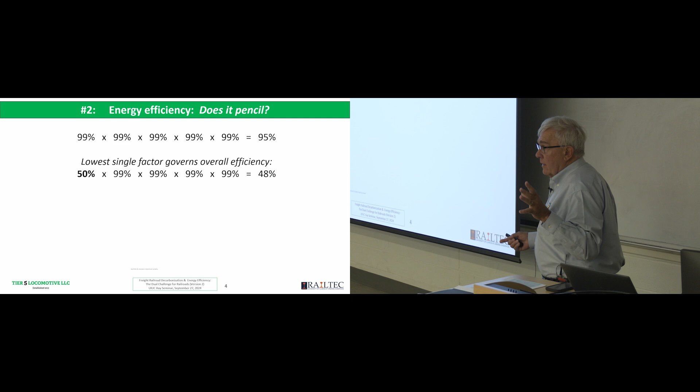So I have an example here of 5 energy conversions, each one 99% efficient, and we end up with 95% efficiency at the end. If I drop one of those factors down to 50%, my overall efficiency goes down to 48%. Basically, the rule here is the lowest single factor governs your overall efficiency.

If we go back in the history of the railroad industry, with steam locomotives, the best steam locomotives in the late 1940s, early 1950s were basically 8 to 9% efficient. The boilers, the latest boilers, were 75 to 80% efficient. The lowest efficiency came from the reciprocating cylinder, followed by the rod mechanism on the driving wheels. But again, overall they were 8 to 9% efficient.

General Motors came out with the first commercially successful diesel locomotive, which was 23% efficient, looking at the diesel engine, the alternator or generator, traction motors, etc. The diesel locomotives were more expensive than steam locomotives, but the overall economic efficiencies were such that railroads in the US basically scrapped half of their fleet. Half the fleet was worn out by the Depression and World War II, and the other half was relatively new, less than 10 years old. The Class I railroads basically scrapped that technology, got rid of the intense shops and staffs required to maintain steam locomotives, and transitioned over to a more expensive liquid fuel. But overall, there were great efficiencies to be gained.

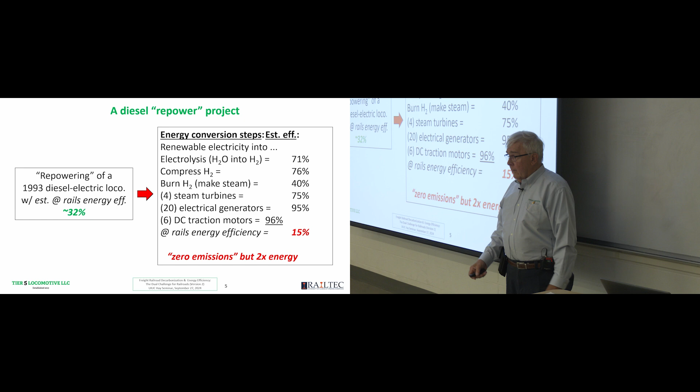Measuring energy efficiency - I want to make a comment here about the two primary forms of ground transportation: heavy-duty trucks and rails. Trucks historically have measured their fuel efficiency and published it in terms of miles per gallon, which is a very crude measure. You don't know how many ton miles they're producing, et cetera.

The historical average for heavy-duty trucks up until 2015 was basically 5 miles per gallon, for a roughly maximum 80,000 pound truck - that's not bad. Since 2015, there have been 3 projects jointly funded by DOE, the truck and trailer manufacturers, and all the accessory manufacturers, including tire manufacturers and rear view mirror companies now going to digital cameras instead of a mirror sticking out being an air drag. The newest trucks are now double the fuel efficiency.

They've gone from 5 miles per gallon to 10 miles per gallon since 2015. Railroads have done pretty well also, freight railroads. Historically, we measure in terms of gallons per 1,000 gross ton miles, over 64 years, and I'll reference - I did an ASME paper back in

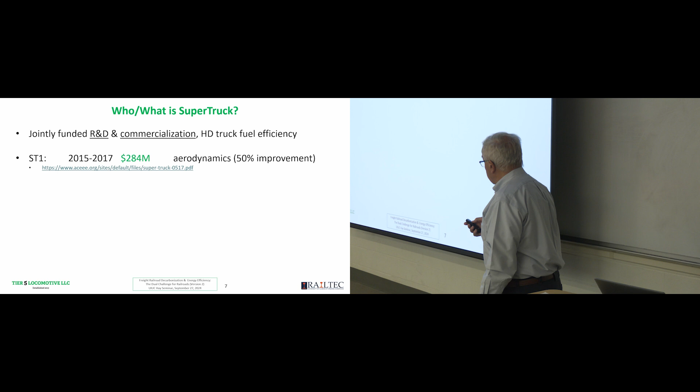SuperTruck 2 followed, and it was high-efficiency engines, taking diesel truck engines from 40+% all the way up to 55% efficiency, a high-efficiency transmission, and other improvements. That basically took the heavy-duty trucks, the new tractor trailers, from 5 miles per gallon to 10 miles per gallon.

And now DOE and most of the same suppliers are jointly funding SuperTruck 3. What's the goal of SuperTruck 3? It's to come up with an electric transmission for a Class 8 tractor, which will enable the truck to generate its onboard energy from either hydrogen fuel cell or batteries. When you add up the 3 SuperTruck programs, it's just short, by my math, of $700 million. This was, to me, a golden opportunity for the trucking industry.

Again, it's half federal dollars and half manufacturers. Most of the improvements have now been commercialized and are available for those who go out and buy Class 8 tractors and Class 8 semi-trailers.

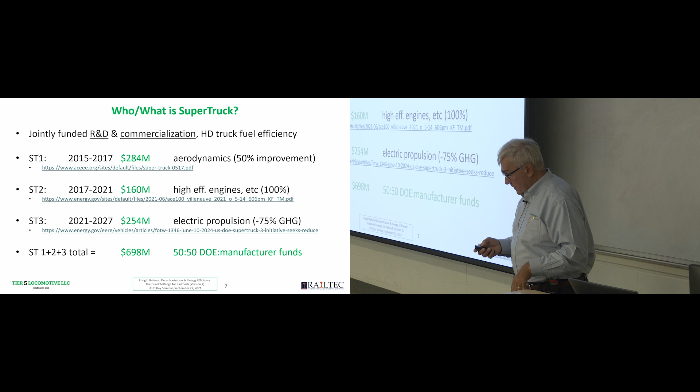I'm not a country western fan, I'll admit, but when I'm driving on the interstate coming down here, I have a certain tolerance for Willie's Roadhouse, Willie Nelson, and I like some of the country western.

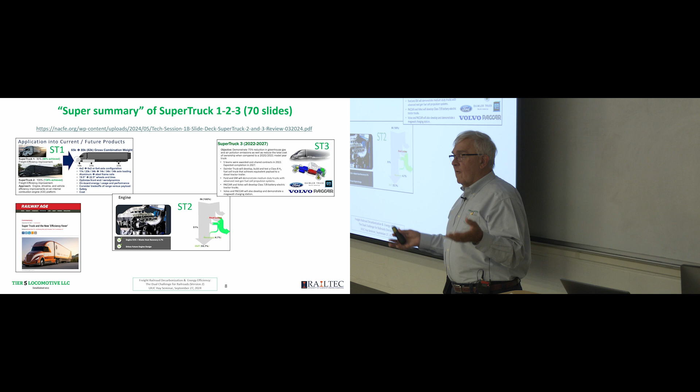I stumbled on an old country western song called Freightliner Fever, from I think 1965. He talks about blowing a freight train off the tracks coming out of LA with a Freightliner that obviously was cruising slightly above the speed limit. The thought occurred to me, this is a great segue to talk about SuperTruck versus the railroad. So you might want to look up that article and look up Freightliner Fever while you're at it. It's kind of a catchy tune.

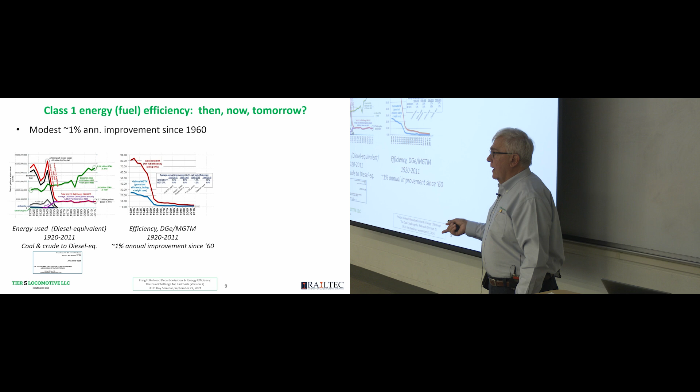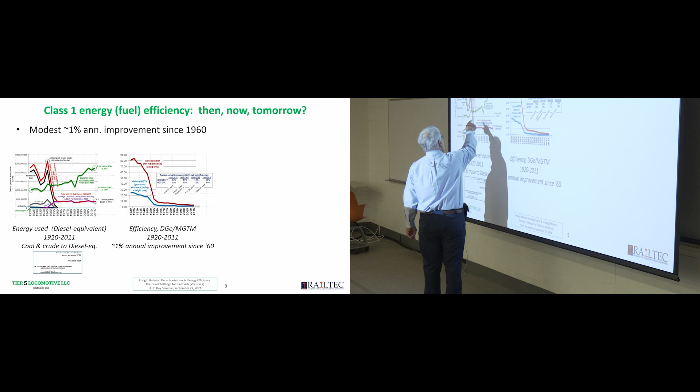This bold red line shows the peak for energy usage. In 1945, the freight railroads used the equivalent of 27 billion gallons of diesel fuel. Today we burn just over 3, so we used 8 times more energy than we do now. And we handled, in terms of gross ton miles, about 13 billion gross ton miles back then, and now we're about 3 times better in terms of the work we're doing. So we've made a tremendous improvement in fuel efficiency.

However, it averages out to a 1% improvement per year in gallons per 1,000 gross ton miles, and that would be my blue line here. The top line is revenue ton miles. Gross ton miles, I think, is more realistic because you have to move the freight car and the lading. That's why I favor gross ton miles.

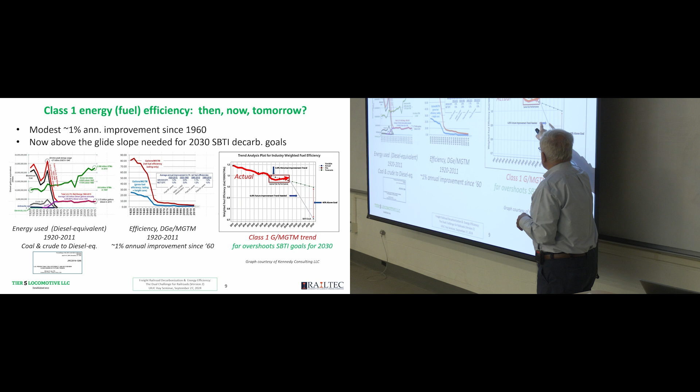It's gotten worse. What Wayne has done here is plot this line, which is the fuel efficiency improvement that would be needed to get to the published SBTI goals for decarbonization by 2030. The bottom line is that instead of a flat or 1% improvement right now, by Wayne Kennedy's math, the 6 Class 1s will have to kickstart and get a 6.8% improvement in order to get there, if you're depending solely on fuel efficiency improvement to meet your 2030 goals. So again, this is another example of how energy efficiency projections and decarbonization goals get tied together.

All right, next slide: alternative locomotive energy efficiencies. I call this the taste test. I love to go shopping in a store, I love going to a hardware store, I love to look at all the neat things and think, what could I do with this? I'm tempted to buy it sometimes, but I resist because it ends up on a shelf or in a drawer, and then the wife asks what I bought it for. But I was shopping one day and saw this display of a popular brand of soda pop, and I said, someday I'm going to use this photo, and here it is.

So we're going to take a bit of what I call a taste test. Has everybody heard about Sankey diagrams? Just to be clear, Matthew Sankey was an Irish engineer, and he produced what is recorded as the first true Sankey diagram, which shows energy in and work out of a system.

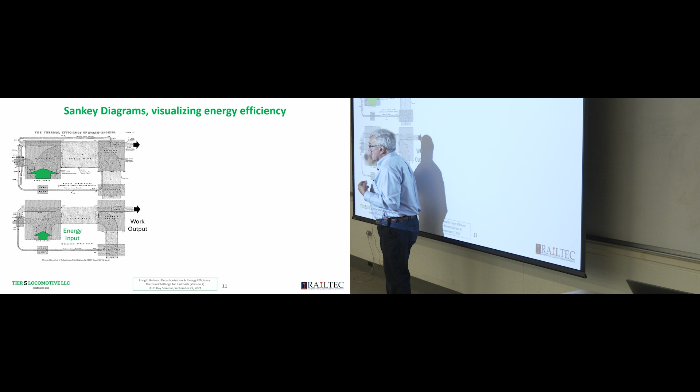The bottom diagram is a 1898 steam engine, assuming it was thermodynamically ideal, and on the top was a state-of-the-art 1898 steam engine. Again, you can see the comparison. The work out is the same, but the ideal engine has a much lower energy input than the actual engine. The difference is inefficiencies, friction, heat loss, et cetera, that makes the engine less efficient than the ideal engine.

In fact, it was Dr. Tyler Dick, who formerly got his PhD here and is now a professor at University of Texas, Austin, who turned me on to it. It's called Sankey-matic. It's a free package, and I'll show you some of the Sankey diagrams I put together.

If you divide energy services, which is useful energy, by the total of 100.3, you end up with roughly 33%. So 1/3 of all the energy we as a society use, from solar, wind, nuclear, hydro, coal, petroleum, etc., 67% of it goes away. It's not destroyed, it's lost as friction, heat, etc.

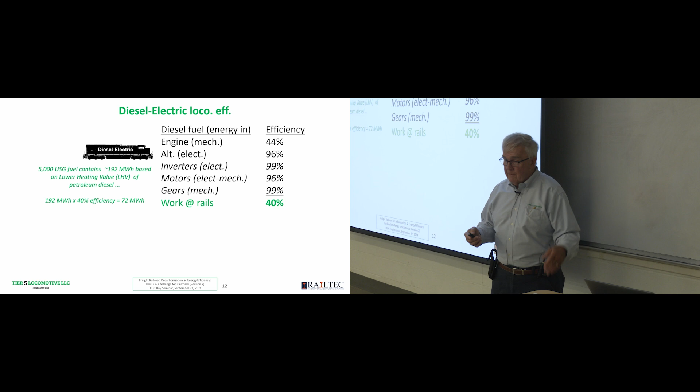If I convert that into a Sankey diagram, this is what it looks like. Again, for consistency, what I'm doing is showing 1 unit of work at the rails, and if you back up, you can see we have to start out, by my math, with 2.52 units of energy going in to get 1 unit of energy out at the rails as work. This is where, if you do a calculation using the lower heating value of 5,000 gallons of diesel fuel, by my estimate, it's the equivalent of 192 megawatt hours of energy.

The largest battery electric locomotive announced so far is 14 megawatt hours, for a mining company from a US company, for a mining railroad in Western Australia. It's 14.2 megawatt hours nameplate capacity, with actual usable between 85 and 90%. So you can see the utility of liquid fuel - we've got basically 192 megawatt hours of energy, and if you shake it down with the efficiency factor, you actually have 72 megawatt hours that are usable.

So that to me is a benchmark that I compare future locomotives, particularly battery electric, against in terms of: can I do the same work that I'm doing now? Now I want to branch off here and talk briefly about diesel engines, large bore diesel engines which are in locomotives, and proton exchange membrane or PEM fuel cells.

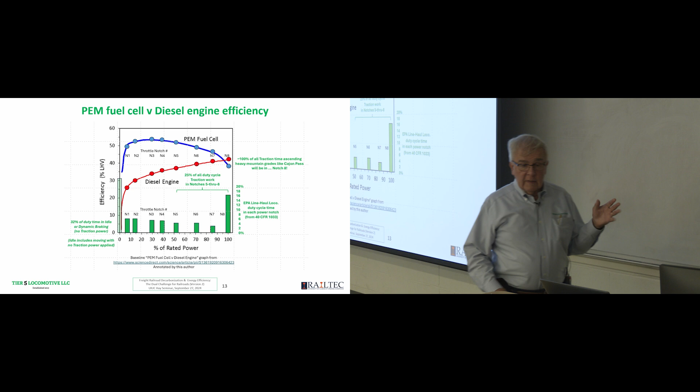So to me this is an issue that needs to be looked at more closely in discussions about potential fuel cell locomotives. Now I took a crack at a Sankey diagram for a fuel cell locomotive. Let's back up and look at the diesel electric: 2.5 units of energy going in, 1 unit of energy coming out.

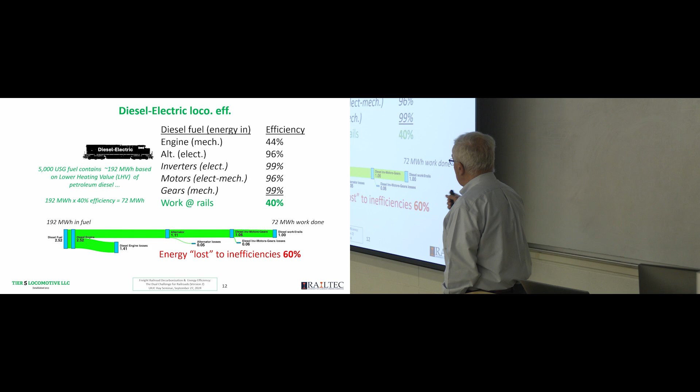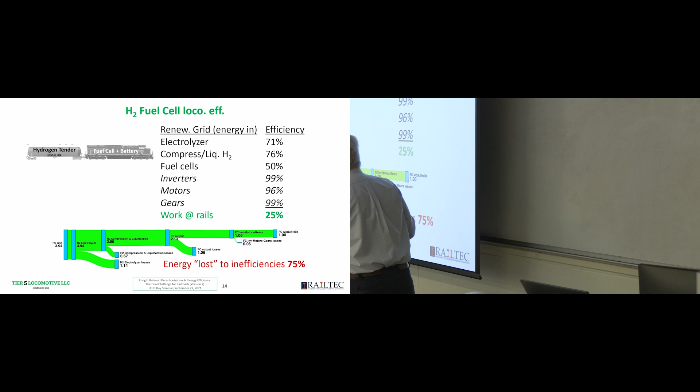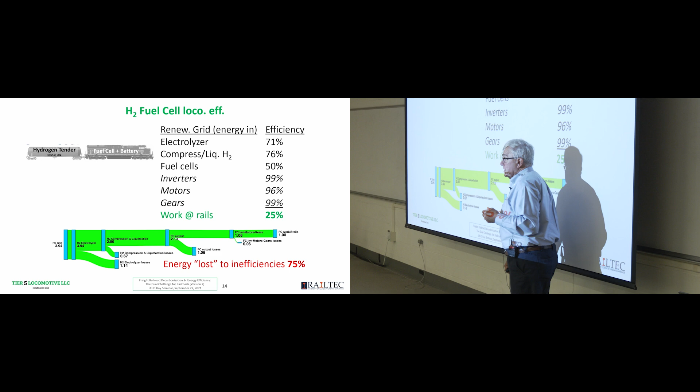When I look at the fuel cell locomotive, by my math, when I pencil it out, I start with just under 4 units of energy and get 1 unit of energy out. The biggest efficiency losses are - I start out with renewable electricity from a renewable grid, which we don't yet have. I lose 29% of the inbound energy to process inefficiencies in the electrolyzer, waste heat, etc. Then to compress it, I use another 24% of the energy - I get 76% efficiency to take the raw hydrogen gas and compress it.

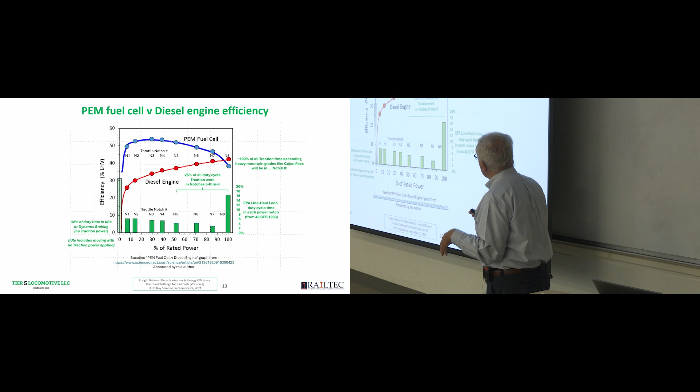If I want to liquefy it, my energy use is even greater than compressing it, so I'm just going to use 76% efficiency. The fuel cell itself, going back to what we showed, I'm assuming 50%, somewhere in the middle between 60 and 50%. And again, the same 3 final transmission items - inverters, motors, and gears. I end up with, by my math, 25% of the inbound energy at the rails as useful work. There's our Sankey diagram again. So by my math, I lose a total of 75% of the inbound renewable energy to inefficiencies.

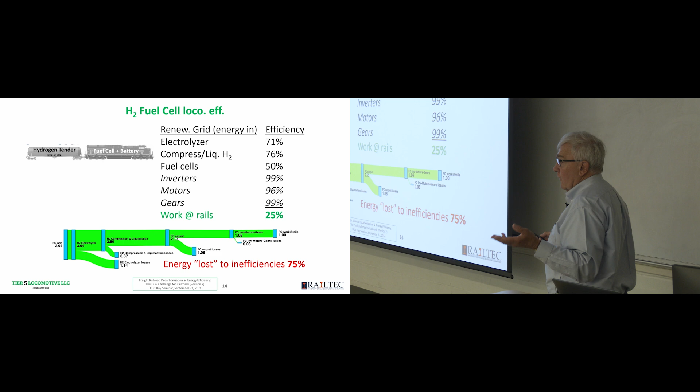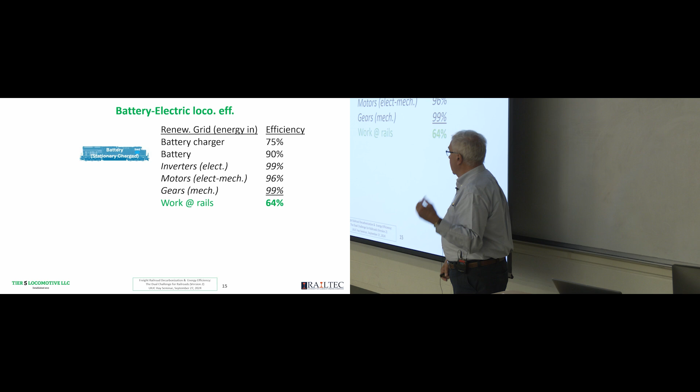If we do the same for a battery electric locomotive, again the final 3 transmission items are the same. The biggest loss is from the grid through the battery charger itself, and then a 10% round trip charging loss going in and discharge loss coming out of the battery. I end up with 36% loss, 64% efficiency.

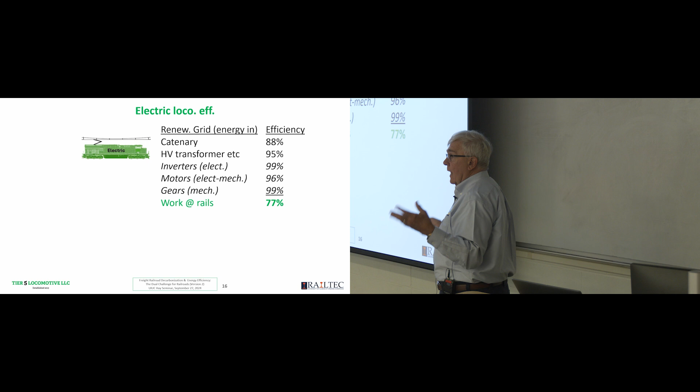And if I look at an electric locomotive, taking power directly from the grid into the catenary - about a 12% loss through the catenary system itself, then the onboard high voltage electrical devices, step-down transformer, line converter, etc., 5% loss, 95% efficiency. The same 3 transmission items, I end up with an efficiency at the rails of 77%, or a loss of 23%.

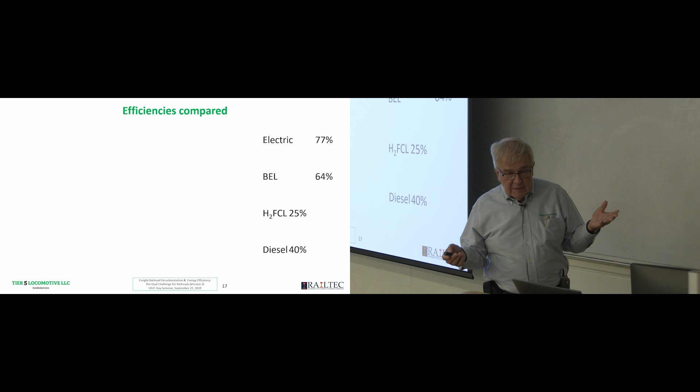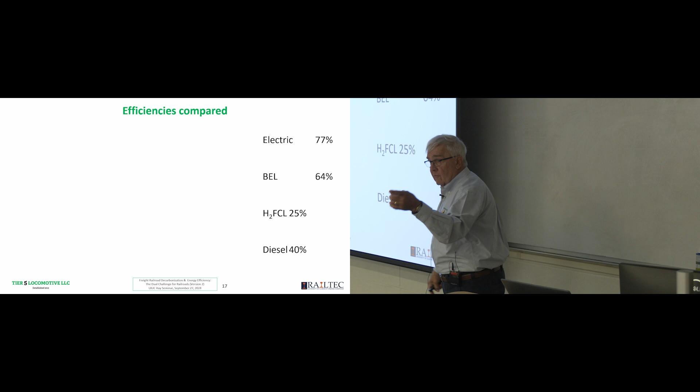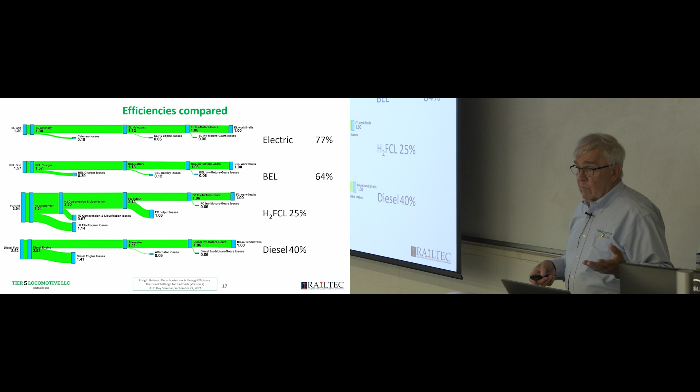Now let's - I've summarized the numbers here, and yeah, this 25 should be here and this 40 should be over here, so pardon that, I'll try to correct that for your file. But if we look at the 4 Sankey diagrams, that's how these things look. And I think this kind of analysis is something I'm finding sporadically.

Battery electric efficiency is much wider, 56 to 71%. The biggest issue is whether you're charging the battery electric locomotive stationary, or charging it in motion from the catenary, which tends to be more efficient but requires more equipment. You need a charging system on board the locomotive to take, for example, 25,000 volt AC and put it through a charging system to charge a battery that operates in DC volts.

And the hydrogen fuel cell range is amazingly pretty close, 17 to 25%. Diesel, I think most of the state-of-the-art Tier 2, Tier 3, Tier 4 are in the 35 to 40% range. But again, with the three electric modes we're looking at grid energy coming in, whereas with diesel we're starting out with liquid fuel in the tank.

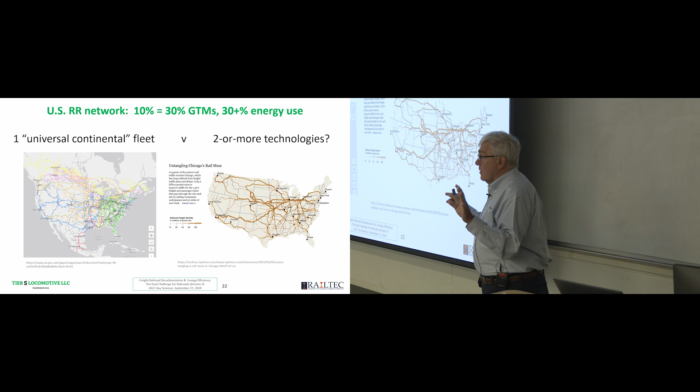So as we move forward, what's going to happen? Are we going to have the same fleet burning different fuels, or will we have to transition in part or in whole to some new technology? This is where I feel there needs to be a calm analysis of all the alternatives, including electrification, for the highest density main lines. That's all I'm going to say, but that's something that needs to be done.

Last week there was a Railway Age webinar, and I was fortunate enough to be invited. I presented some of the same slides about energy efficiency, and Jason Kuehn, vice president of Oliver Wyman Rail practice at Oliver Wyman Consulting, made a presentation, and I've copied one of his slides here.

I've actually copied two slides. He pointed out, as I've done in previous presentations, that heavy-duty trucks right now, the 8 largest fleet operators, J.B. Hunt, Swift, Schneider with the orange trucks from Green Bay, Werner from Werner Transportation from Omaha, the 8 or 9 largest fleet operators, they wholesale off their entire tractor fleet roughly every 2 years and buy a whole new fleet. They do that for 2 reasons: one, they avoid engine and transmission overhauls, and the trucks get cascaded down to the used market. It goes down to the large regional truckers, and then eventually, after about 7 years, it maybe goes down to the mom and pop fleets, the owner-operators, etc.

What he shows here graphically is that over a 30-year span, the trucking industry can have 10 to 15 turnovers of technology. If you replace your tractors every 2 years, in 30 years you will have been able to acquire 15 turnovers of technology. We, on the other hand, have essentially a 30-year locomotive, and we just replace the engine. So there's this difference between heavy-duty trucking and technological turnover and the railroad industry.

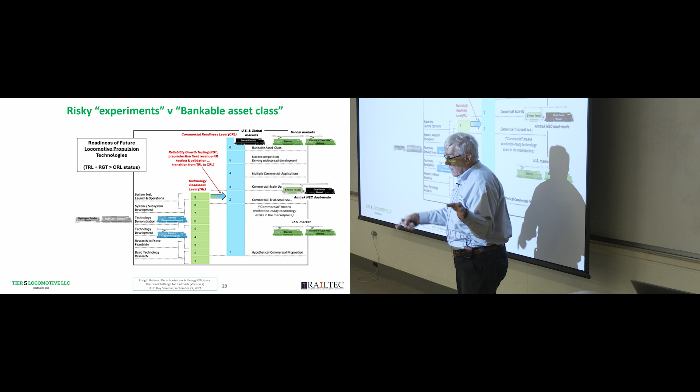There's a chart called TRL, Technology Readiness Level. It was produced by NASA, largely to sell the space shuttle to Congress. And the space shuttle was ranked at TRL 9, which means ready for launch. Unfortunately, there were five space shuttles built. There were 135 launches, 2 of them were catastrophic with loss of craft and loss of crew, the Challenger and the Columbia.

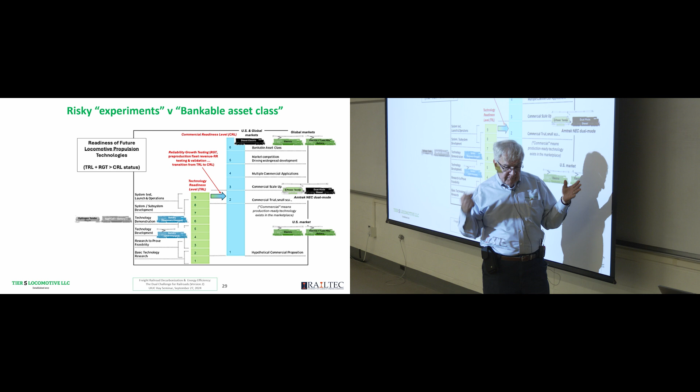And that's not real world for commercial aviation, obviously. So the TRL scale is good for experimentation. I've put on here, for example, where I think fuel cell locomotives are today, and battery locomotives with stationary charge. There's some work going on about battery locomotives with mobile charging. I've heard some rumors. But diesel electric locomotives are up here on this blue chart, which I found from Australia.

They call it the commercial readiness level. And at the very top, level 6, what do we see here? Bankable asset class. That means if I want to buy these, if it's at commercial readiness level 6, I should be able to go to an insurance company, a bank, whoever's got money, and get money to buy these and lease them and give them a good economic return, and not run the risk that these locomotives are going to get scrapped after about 7 years, which I did once with some 6,000 horsepower locomotives.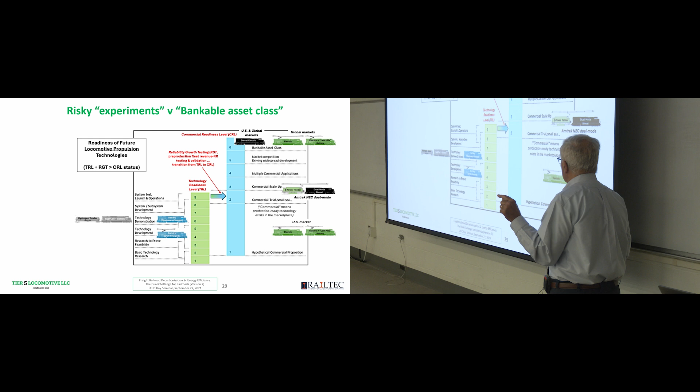So the key thing here, I have seen 2 generations of two brands of 6,000 horsepower: the Green Goat battery hybrid, diesel battery hybrids, and the genset locomotives. They were all basically rushed into operation and commercialization without going through adequate RGT.

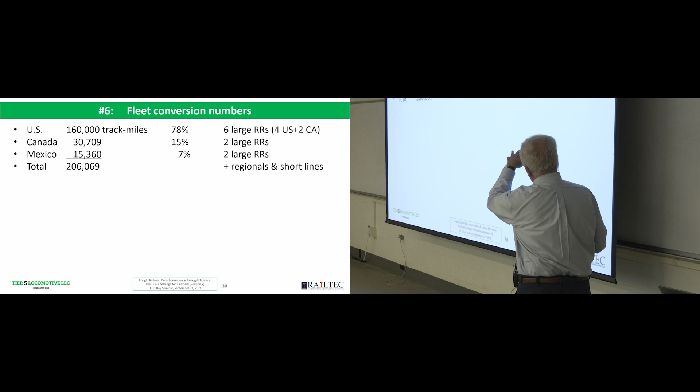Okay, fleet conversion numbers. Again, 160,000 track miles, 206,000 on the whole continent, 6 railroads in the US, 2 of which are in Canada, 2 of them also operate in Mexico, plus regionals and short lines.

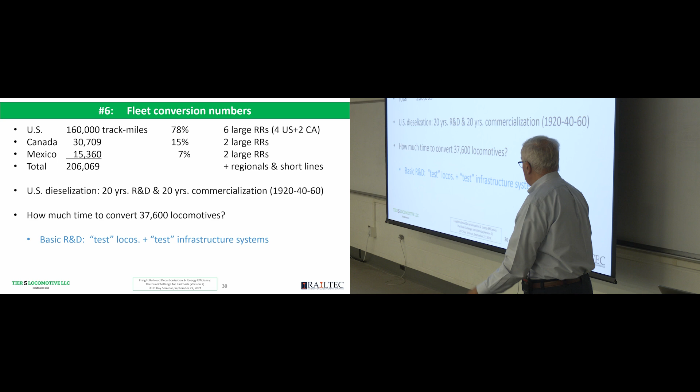And you can scale this down. I'm breaking it down into doing basic research and development, engineering, reliability testing of pre-production locomotives, and finally going into commercialization. And again, if you want to look at just the 23,600 locomotives on the Class 1 railroads in US, Canada, and Mexico, just the Class 1 or Class 1-like railroads, the big units, you can scale that down by 75% from 37,000.

Okay, I'm going to start with the year 2025. I want to end at 2050. If I assume that I can do 1 year of engineering combined with reliability growth testing, which is way too short, I'm going to have to modify over 25 years, 1,500 units per year. You can see as I spend more time doing engineering and testing, I have less time for production, so the conversion number goes up.

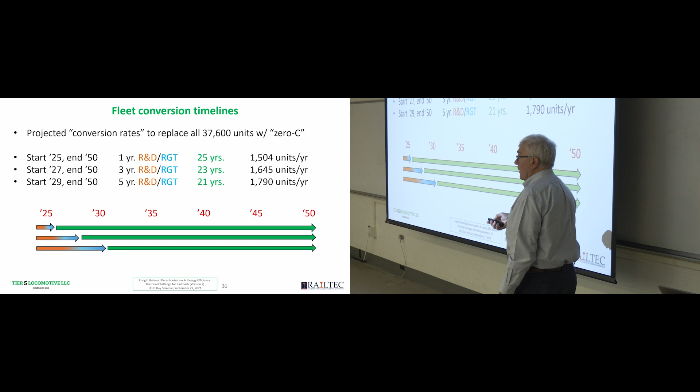Again, if I do 5 years of engineering, R&D, reliability testing, I end up with 21 years to do the conversion. If I spend 7 years, I've got to cram all my achievements into 19 years. And a point of reference here: the best year that the railroad industry in multiple decades was able to achieve was right around 1,550 new locomotives in a year, I think it was 1999 or 2000. So again, assuming we're going to modify or make new locomotives, these are the number of units you have to accomplish in the ever decreasing number of years you have to get to 2050.

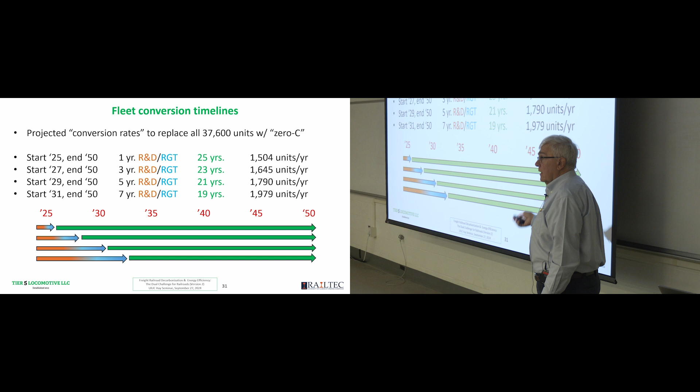Now, how quickly can green hydrogen replace diesel? This is where we talk about fuel cell locomotives.

Right now there's roughly 60 billion US gallons of diesel fuel used in the US. 40 billion goes to heavy-duty trucks. Ag and construction consumes 14 billion. Rail is about 3.9 when you add up freight, commuter, passenger, and Amtrak. Waterway is about 2.4 billion. I've rounded these up or down to 60 billion gallons.

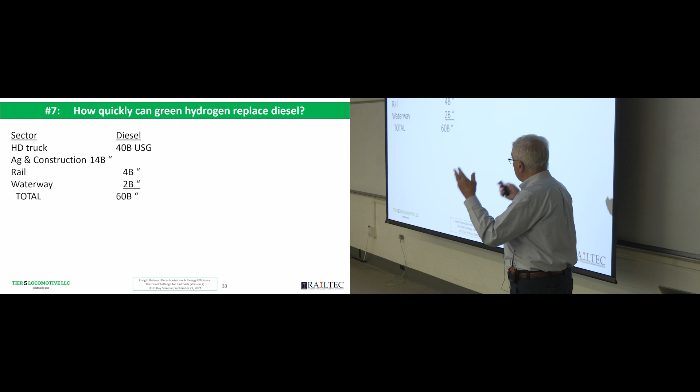Have you all heard about hydrogen hubs from Department of Energy? Anybody not heard? Okay, you can look it up.

The Department of Energy is making the final selection of 7 proposals around the country, obviously a political decision, where prototype hydrogen production plants will be built. DOE is contributing $7 billion, and the private partners are to contribute $40 billion, for a total of $47 billion on these 7 hydrogen hubs.

The goal is to produce just under 3 million metric tons per year by 2030. That's equivalent to just under 3 billion kilograms of hydrogen, and a kilogram of hydrogen is roughly the energy equivalent of a gallon of diesel.

Fortunately, an easy conversion. So in order to replace, rough order of magnitude, 60 billion gallons of diesel, you would need 20 times this project. 20 times 3 billion gives you 60 billion. 20 times $47 billion is $940 billion, just under $1 trillion.

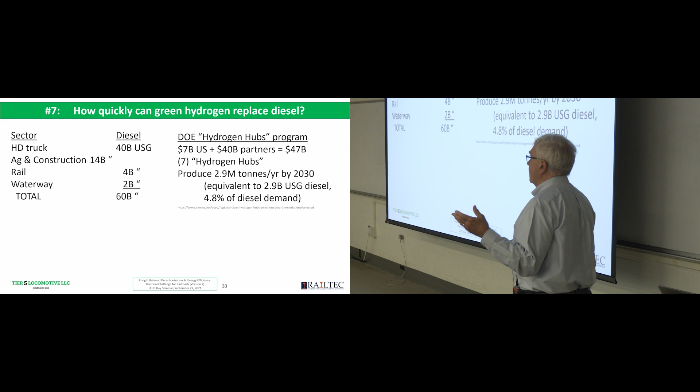So $1 trillion here and $1 trillion there. You better have an executive membership at Costco to get your, what is it, I think 5% back every year. Anyway, $1 trillion here, $1 trillion there, so I get half a trillion back, or I get a trillion back. No, I get $50 billion back, whatever. Big money.

So is there enough hydrogen by 2035 or 2040? I think we're not going to have sufficient zero carbon hydrogen quickly. It's going to take time. So this is another factor that's going to enter into any decision to use hydrogen fuel cell locomotives.

I did a calculation last year at the environmental conference, and you'll see this later, but the biggest plant in China right now is 30 million kilograms per year, 848 million US dollars. So pricing it up with labor and material costs, it's just over 1 billion.

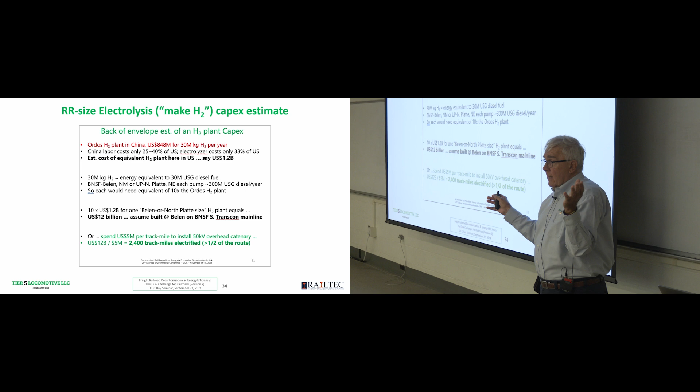The way I look at it, to put one of these plants at Belen, New Mexico on the BNSF Southern Transcon, by my math, you've got enough money to string catenary on 2,400 miles, one of the two tracks between Chicago and LA. But it's an order of magnitude calculation. I'm not trying to do battle with any entities here.

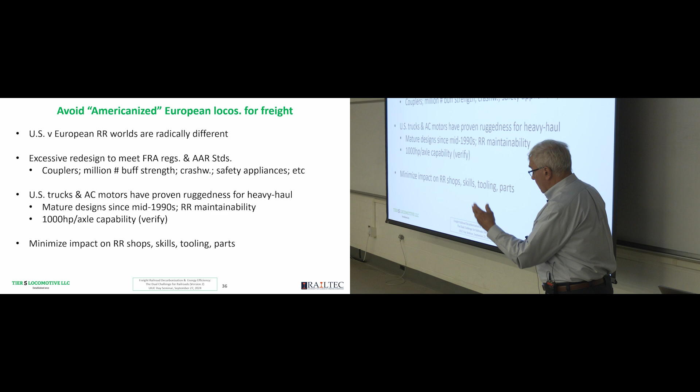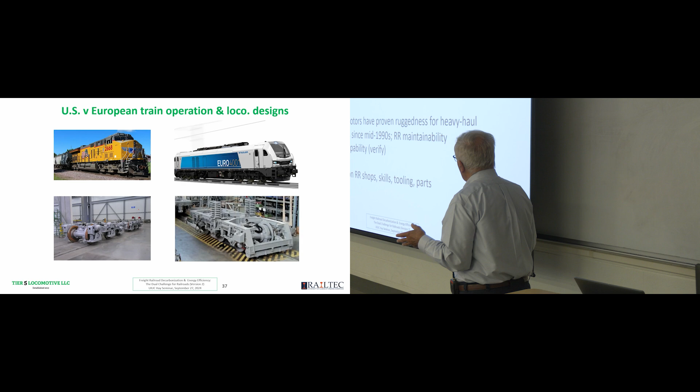Last thing, suggested path to future locomotives. In my opinion, people have said, well, there's these great electric locomotives in Europe, in Sweden, in Germany, and so on. I don't want to take European locomotives and Americanize them. They're not designed for operation in North America, and there are great differences in the trucks, the traction motors, the car body.

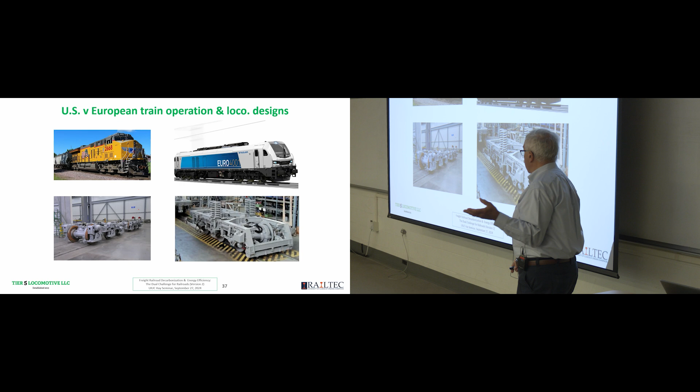You don't have switching steps. You don't have the million-pound underframe. There's a lot of work to make this locomotive, or others like it, pass the FRA and AAR regulatory and standard requirements. So what I'm saying is, forget about Americanization of foreign locomotives.

Fortunately, with the locomotives we have, I think one of the pathways is to take existing locomotives. You've basically got the engine, the alternator, the cooling system, etc. If you look at the battery electric made by Wabtec in Erie for Roy Hill, it's a 7 megawatt hour, essentially an Evo 4,400 horsepower Evolution AC locomotive that they basically started from scratch, but I think it's a highly modified diesel electric locomotive underframe, same trucks, same traction motors, etc.

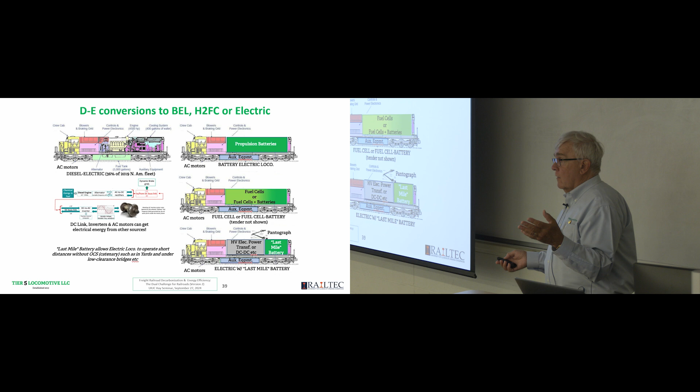What I feel is that we've already got a platform that, you know, you can have diesel electric locomotives, or you could make new similar battery electric, fuel cell electric, or even straight electric locomotives. So the talk about needing 7 to 9 years to engineer a new electric locomotive, I don't see that as realistic. I think that's excessive.

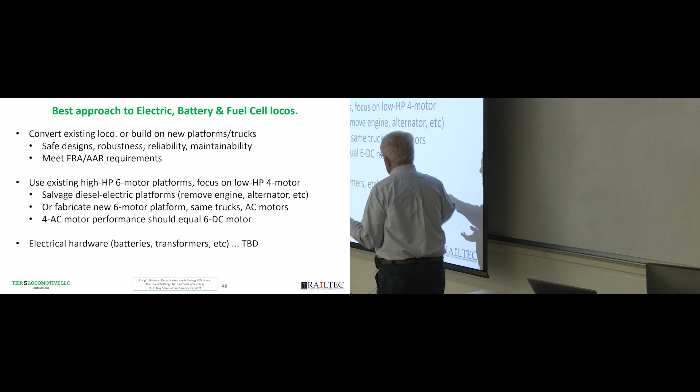Best approach, again, I feel is to convert existing locomotives. Another thought I have is if you put AC motors under, let's say, a modified GP38 4-motor locomotive, that AC traction motor locomotive should be able to pull as well at low speed as a DC locomotive with 6 motors. You can get more adhesion, more work down to the rail with AC motors.

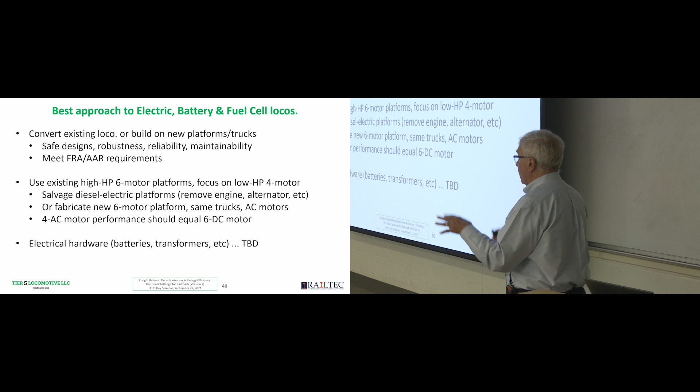So there's a couple of things that need to be thought about here if we're going to pursue this. From our history here, back in 1990 to 1992, the AAR had a working group. I think I'm the only person still in the industry who was a member. There were 26 railroads, including Amtrak and the former British Columbia Rail. The mission was to develop a specification for 26 test locomotives using AC traction that would be distributed to the member roads.

The railroads would pay for this through the AAR, and the AAR economics staff in Washington was also tasked with looking at the economics. On the first pass, they came back and said we can't afford these AC locomotives.

The premise was that AC traction motors would eliminate the extensive and expensive maintenance of DC traction motors, which have commutators, carbon brushes, etc. And the ROI analysis proved that was bad. You couldn't afford the locomotive.

There was one railroad that said, wait a minute, how much more tonnage can I haul with AC motors and the same horsepower? And when that calculation was run, it came out positive.

Unfortunately, or fortunately, the Burlington Northern and Electromotive Division of General Motors, in 1992, BN signed a contract for 400 SD70 Macs, and that launched AC traction.

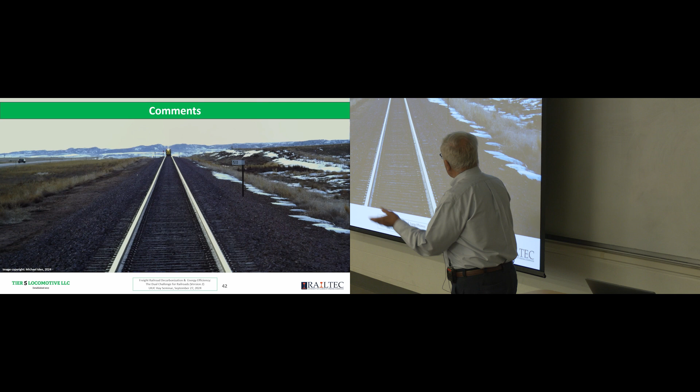But anyway, that brings me to the end here, and I hope this was informative. Again, I am not saying that electrification is the way to go. I'm not saying that hydrogen is not the way to go. There are a lot of details to examine and a lot of decisions to be made, but the key thing is time is passing.

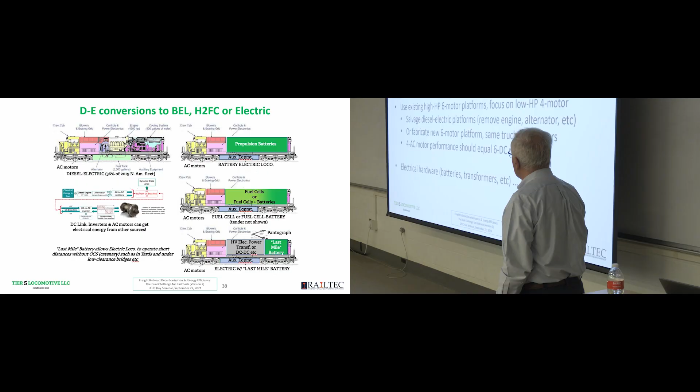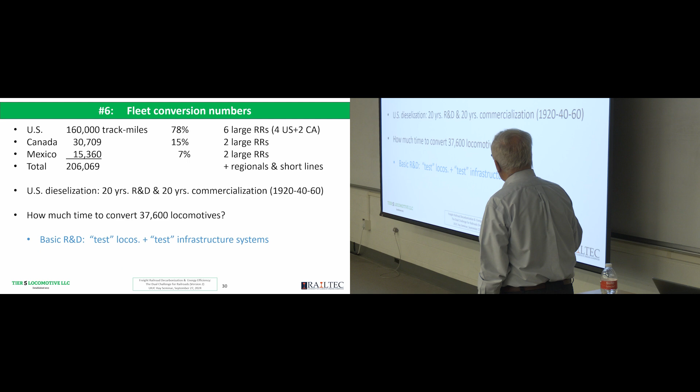Hello there. My question was on, you had that diagram of commercialization and readiness. You ranked, was it like European electric and electric with battery for last mile as very high compared to the American? I was just wondering, is that due to the lack of electrification of the rails in the United States, or is that due to differences in locomotives, essentially?

I think the real answer to your question, which is a very good question—and just forget the slide that I'm fumbling around trying to find the right slide, doesn't matter—the largest freight trains in Europe are roughly 1,700 tons and about a half mile long.

And it's because most of Europe uses the jack, screw, and hook couplings. They don't use the Janney type coupler that we use here, which is good for, on a good day, 375,000 pounds of pull. So to try to run a train like we run it here, often with head-end power, with the tonnages we haul, you would not be able to operate a train that big in Europe.

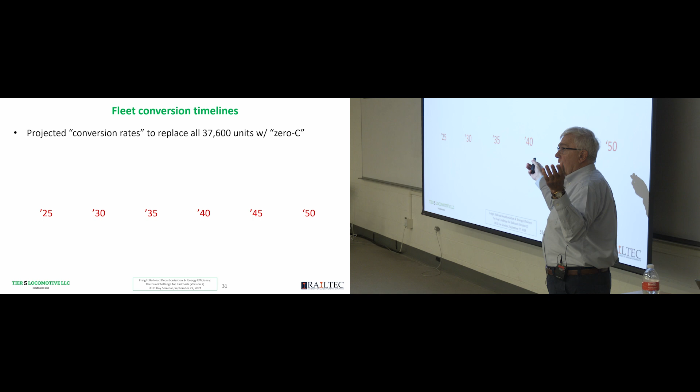In fact, a couple of years ago, there was a big to-do in Europe. They're now running a train that is twice as long as always, because they put 2 trains together and put 1 locomotive on the front and 1 at the rear, basically distributed power. Guess what? We've been doing that for 25 years.

So the biggest difference: freight trains in Europe, and I include the UK in this, are basically operated at a power level that keeps them out of the way of passenger trains. In fact, I was at a heavy haul conference in Dallas, I think in 2004, and there was a gentleman from DB, Deutsche Bahn, talking about the challenges of moving iron ore trains in the Ruhr Valley and keeping them out of the way of passenger trains.

As I recall, they were running 1,700 foot long iron ore trains, which is something we'd never make money on here. But they were operating these trains with sufficient power to get them up to 60 miles an hour. There's no way in our economy that you can run an iron ore train at 60 miles an hour and make a profit, but they were doing that to stay out of the way of passenger trains. So again, the emphasis in Europe is on speed and not on lugging capability.

Does that answer your question? Okay, any others? Yes.

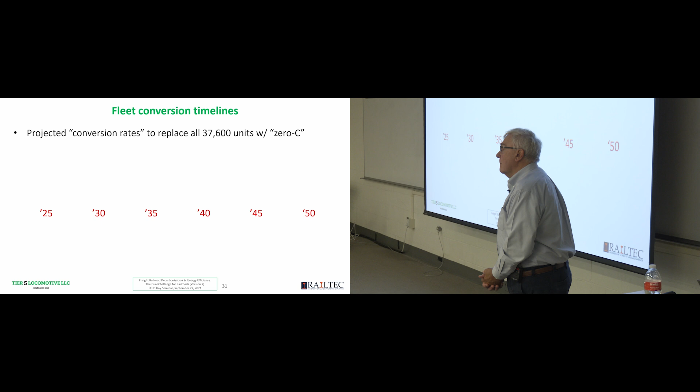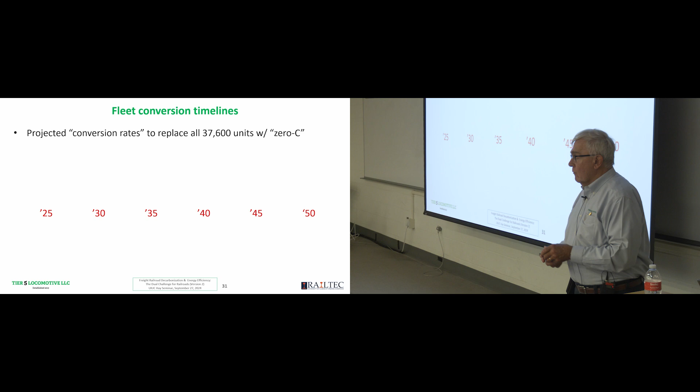So I guess this is more curiosity. When you mentioned the electrification and then the last mile battery, has there been any talk of doing the opposite, where the battery does most of it, kind of based off the moving charging battery concept to a larger extent? Has there ever been any talk of doing that for steep grades or parts where the diesel engine isn't as efficient?

Good question. In fact, the study we're wrapping up now for the FRA, the report won't be available for probably 6 months. It has to go through the FRA vetting before it's released, but I can say a little about it. One thing we looked at, in the limited time we had last week, part of the project was creating a spreadsheet financial model where you can put in different inputs and assumptions and calculate returns on investment.

One thing we looked at was what we call a taconite loop in the U.S., moving taconite ore trains to a dock. We looked at putting in overhead catenary and running electric locomotives, and the ROI was absolutely horrible. We also looked at battery locomotives with stationary charging, and battery locomotives with some intermittent catenary where you can recharge, and that positively changed the return on investment.

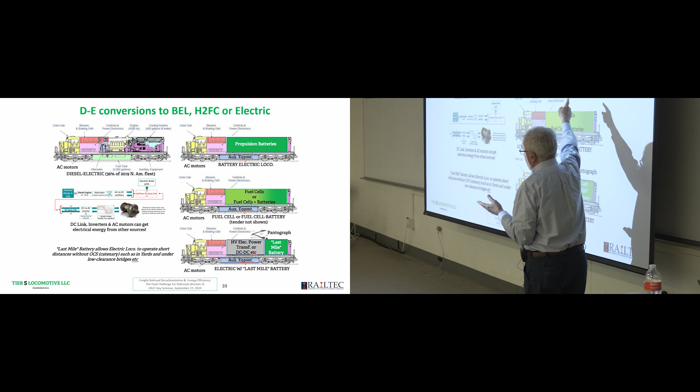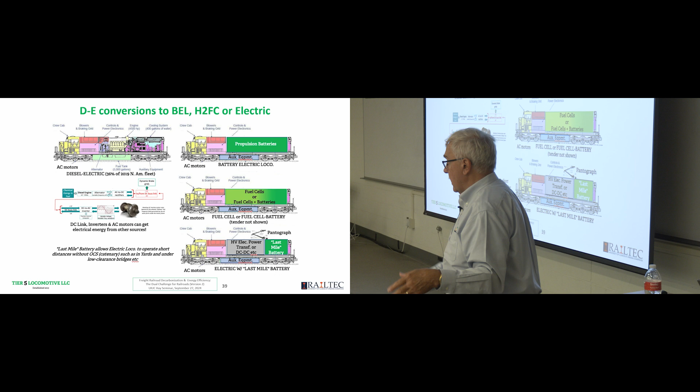So what happens is, when you have a battery locomotive and use discontinuous catenary, instead of having catenary from A all the way to Z, I have catenary from A to B, from E to G, from K to S, for example. I run on battery power in the gaps in between, and when I hit the catenary section, I raise the pantograph and charge the batteries. The alternative is to have a battery locomotive that can go the whole distance on battery charge without depleting all its charge.

And this is where you start to get economic trade-offs: how much catenary I'm putting in, what's the capex, what's the cost of maintaining it, versus can I make the battery locomotive smaller, put fewer batteries in, because batteries wear out and have to be replaced like a diesel engine. So you have these different cost curves. But that's one of the things with battery electric locomotives.

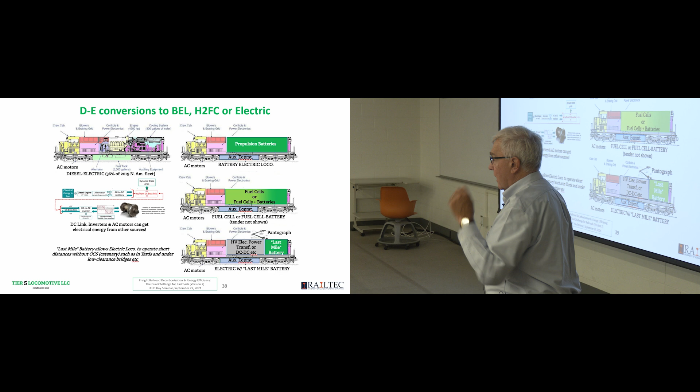The other thing I'll mention is the downside of a battery locomotive if you do just stationary charging. Let's assume it takes, just to throw a number out there, 10 megawatt hours of energy to move the train from here to there. With an electric locomotive, if it has the same power rating and tractive effort at the rails, I'll use the same 10 megawatt hours from the grid.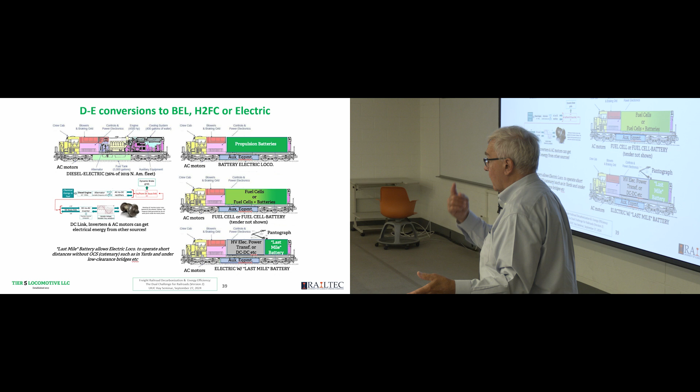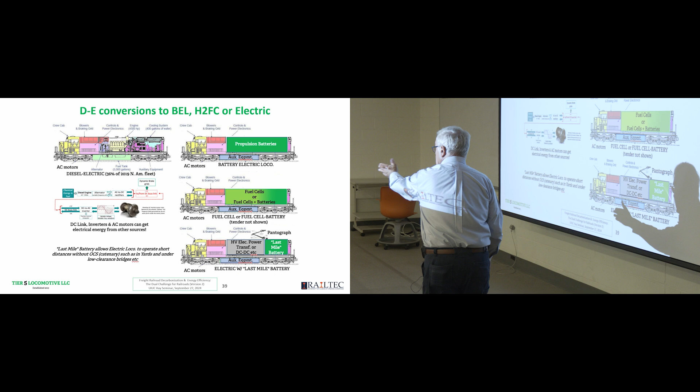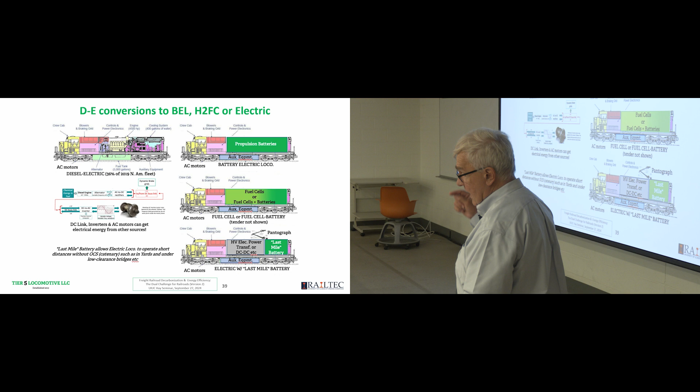But those 10 megawatt hours will be drawn down from the grid from this point all the way across, let's say over 10 distances, so 1 megawatt hour per unit time per unit distance. Whereas if I have a 10 megawatt hour battery locomotive, I want to slam all 10 megawatt hours into that battery as quickly as possible so I can get that locomotive back out to run productively. But now I'm ringing the doorbell of the utility and saying, I don't need 1 megawatt per hour for 10 hours, I need 10 megawatts and I need it now.

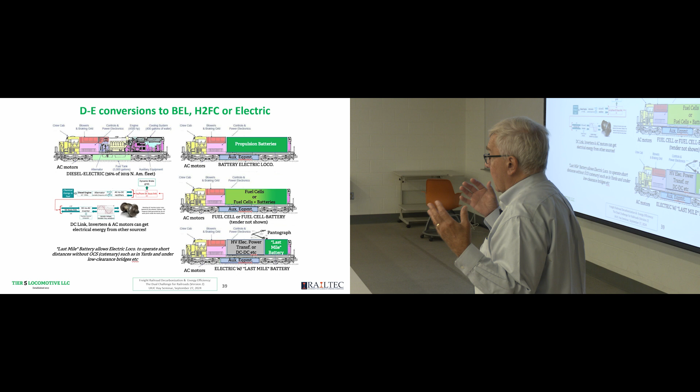And that's where you get into demand charges from the utility. It's like filling a bucket versus running with a long fire hose. You've got a bucket and you want to fill it with a fire hose and carry the bucket across as it leaks. That's the difference between electric and battery.

Has there been any look into swappable fuels? Like you slide out a tank and slide something else in, or you switch out a battery that's already full? Can you have a replaceable battery pack? Has there been any look into something swappable, like you take out a fuel tank or battery and slide a new one in that's full?

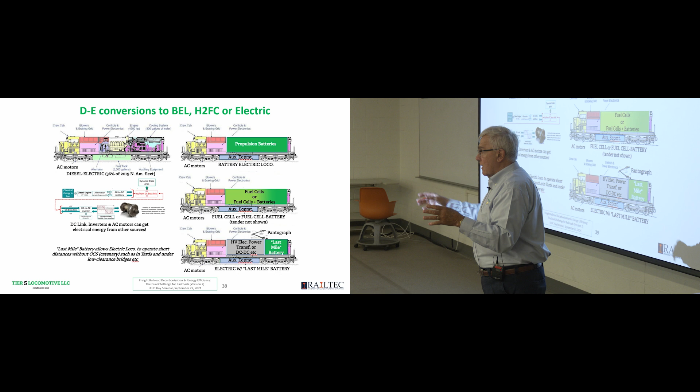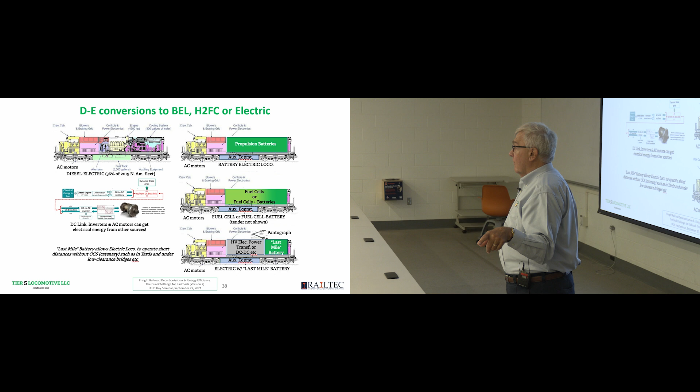There's a container terminal, I'm trying to think of what it is, Long Beach, LBCT, Long Beach Container Terminal in the Port of Long Beach, next to the Port of Los Angeles. LBCT is a highly automated container terminal. I think they have less than 30 people running the whole terminal. The shuttle trucks that take containers from the dock alongside a ship to the stacking racks, or back to the dock to be picked up and put on the ship, those shuttle wagons are battery powered, and they have a replaceable battery. When the battery gets down near minimum, the shuttle tells the computer that controls everything, 'my battery is about to die,' and it goes to an automated building where a robot picks up this 20-ton battery, puts it on a charger, puts a fresh battery on, and the automated shuttle wagon goes back out to work. So that has been done.

But when you start talking about the range of capacity, we're talking some pretty big batteries here. Now you're dealing with what kind of machinery you're going to have, and where you put it in the yard. If a train comes in, like here at Champaign, where do you put this machine to change batteries, knowing you may have locomotives on the front of the train and one or two in the middle or at the rear? Do you stop the train multiple times at one robot, or do you have them spaced out? It gets pretty complex. The answer is yes, but. Does that answer it for you?

Anything else? Yes, sir, right there. You have a radio announcer voice. Go ahead. Thank you. So what was my question?

I guess this is probably still being researched, but specifically for the large batteries, I was curious about fire safety and new technologies there, because electric car battery fires are bad, and this is so much larger. Is there a lot of research going into making that safer or trying to change that?

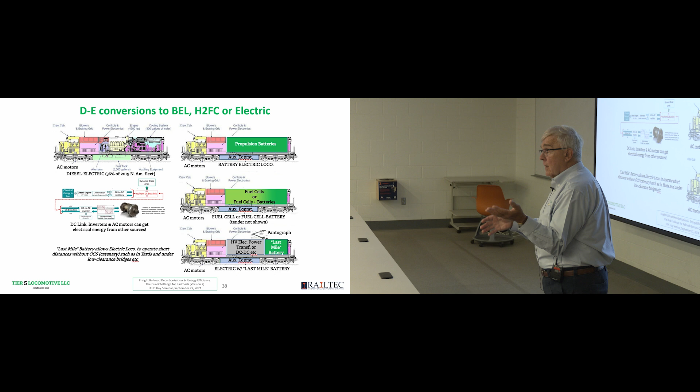I don't know what research has been done particularly on the locomotive size, but I know there's a lot of research going on regarding batteries in general. Back in August, there was a Tesla Class 8 semi-trailer, a Tesla battery tractor, on Donner Pass. The driver let the truck go off the road, it ran into a tree, he survived, and it took the local fire department and the forestry service, I read in the paper, 50,000 gallons of water on Donner Pass on I-80 to extinguish the fire, and they shut down I-80 for about 15 hours. That was just under 1 megawatt hour of battery capacity. So yeah, it's something, and then again, hydrogen has flammability issues as well. It's exceptionally flammable. And our trains never derail.

Well, that's why we count on you to come up with the statistics. Yes, sir. Oh, I'm sorry.

In your first two slides, you had an example where hydrogen was the combustion, but in the actual efficiency diagram, you had a solid state fuel cell. So in locomotives, which generally is more favored?

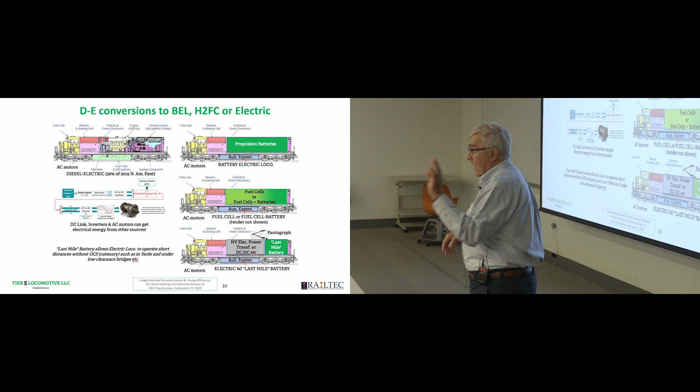Well, if you're going to use green hydrogen with a fuel cell, the hydrogen is technically not a fuel, it's an energy carrier. Because when you make hydrogen through electrolysis, you're creating hydrogen molecules, two hydrogen atoms combined. When you put it in the fuel cell, you're splitting the hydrogen molecule, and when you do that, you combine hydrogen and oxygen to make water, and you generate electricity. So in a fuel cell application, hydrogen is an energy carrier. You can also use hydrogen in gaseous form as a fuel by injecting it into a diesel engine. So that's the difference: in one application hydrogen is a fuel, because you're burning it, and in the other application you're actually carrying electrons into a fuel cell.

That makes sense, but my question was more, is one more favored over the other? Or is one more efficient?

Well, I think in general, people would like to use hydrogen in diesel engines because I can keep the diesel engine. So I've got an installed base of diesel engines, but the question is, can you modify all the diesel engines, or are we talking just about the latest generation, because there are different generations of diesel engines out there. So they're not necessarily all modifiable. We learned that with natural gas.

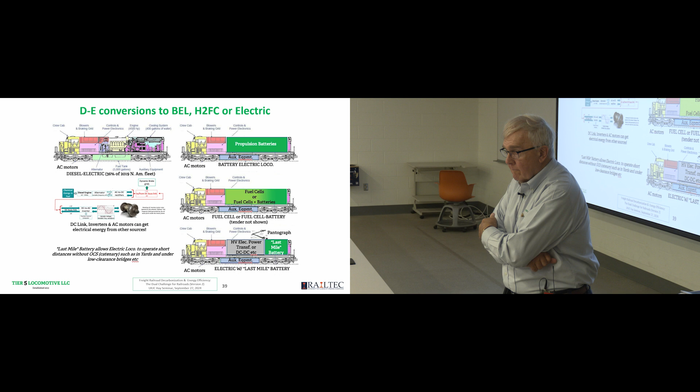But here's one. It seems like Class 1 railroads are on the fence about adopting new locomotive technologies in the first place. If and when we get past that, do you have any insights into who should fund capital-intensive new technology? Wow, the biggest question first.

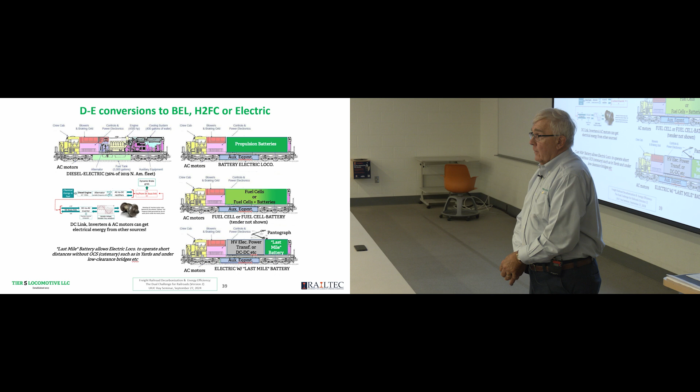Well, I think the reason for the phrase 'the railroads are on the fence' is that if you're going to have to go this route with brand new propulsion technology, it's going to be like steam to diesel. It's going to be a major undertaking, and it's not going to be cheap, and there will be risks. There will also be opportunities, but it's going to be a big challenge. So right now there isn't enough evidence which way to go, and in my opinion, that also means there isn't enough economic evidence of which paths are most likely to lead where you need to go if you're going to have to do that.

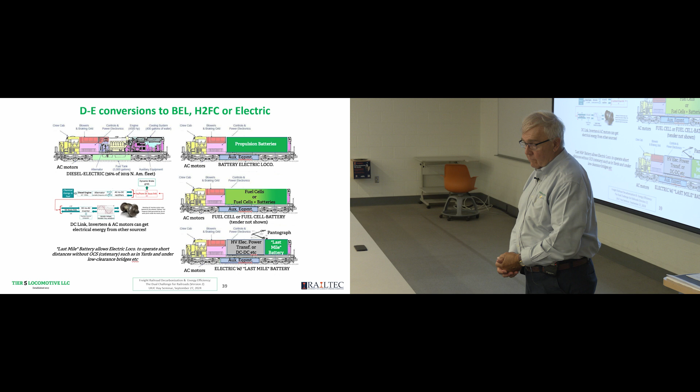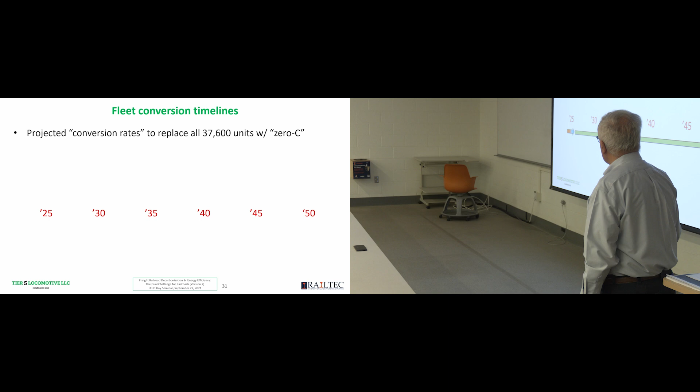I think personally it would be good. I want to mention here that Supertruck is resident in the Department of Energy in a program called Supertruck, and the head of the program is Dr. Siddiq Khan. I recently became aware that his title was manager of Supertruck, and his new title is manager of Supertruck and Rail Decarbonization. So does that mean DOE is interested, or does that mean he's just got two or three more words on the end of his title?

I don't know. Okay, well, here's another question. Have you tried penciling the effect of energy recapture on the efficiency of various electric technologies? In other words, regenerative braking and the...

Yeah, there will be some advantage to capturing regenerative brake. Right now with dynamic braking, you put it into the resistor grids and dump the energy to the atmosphere as heat. Regenerative braking is where instead of boiling it off as heat, you put it back into the catenary or into the batteries, and there's a lot of hope for this with battery locomotives and fuel cell locomotives. The problem is, depending on the route and the train, if you're generating a lot of dynamic brake, eventually the battery gets charged and will cry uncle, and you won't be able to put any more into it. You'll have to revert back to dynamic brake and waste it to the atmosphere. So it's not an easy one-size-fits-all solution. There's some potential, but I think to some extent it's been over-considered and over-promised. It's going to be very route and train dependent.